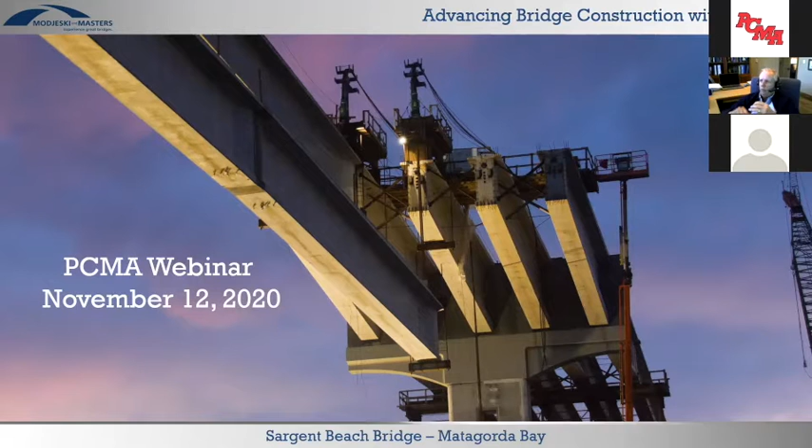A lot of the concepts I'm going to be going through are really small refinements of ideas that have already been developed by others, and we're just trying to make them a little better with every project that we go through. Just to give you a little background, I know Chris did a very good job of explaining and introducing me and explaining what my background is.

I've spent my whole career really involved in pre-stressed post-tension concrete bridges. And my perspective, I think, is that I've spent the majority of my time working for contractors or as a consultant to contractors. So most of my experience has been on the construction side. And we've actually designed bridges for precasters, for contractors, various other clients.

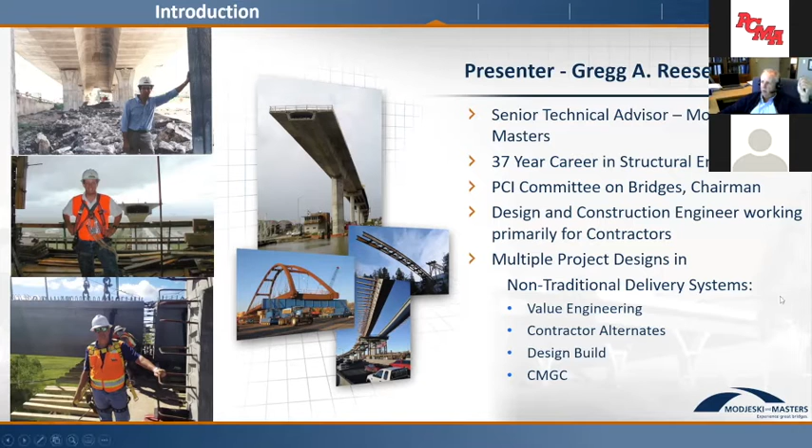Outside of your more traditional delivery system, so I've got a little bit different perspective on that, and what that means is that we approach our projects from a constructability-first standpoint, and we try and use what we call constructability-based design, which I'll be going into in more detail as we go through this.

Moving into our presentation here, precast concrete construction really falls into a category of prefabricated bridge elements and systems. This is a category that AASHTO has designated as a key component of accelerated bridge construction. I like to call it Lego construction because to me, this is real similar to Legos.

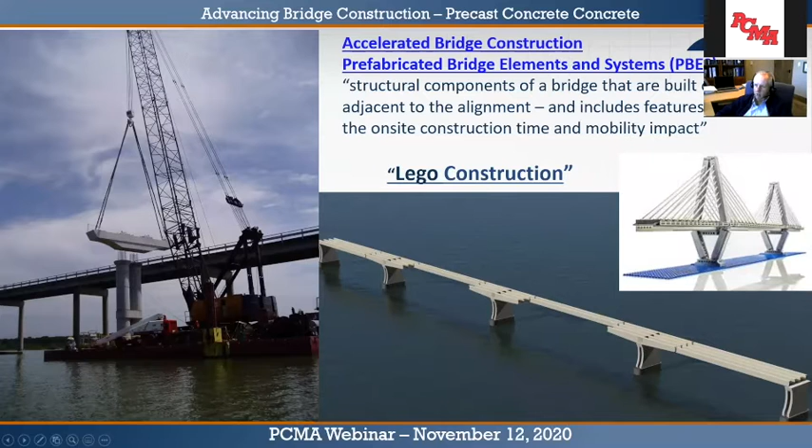If you've ever built Legos with your kids, you dump the box out on the dining room table with the instructions, and hopefully in a matter of hours you've got a Millennium Falcon there on your hands. Precast concrete really kind of goes together the same way. I found this nice little picture of a cable-stayed bridge made out of Legos. What it means is you're bringing pieces to the site that are already made, and you're assembling them on site in a more rapid fashion to really create complex structures.

As I go through this, I'm going to be talking really from project experiences, and I've tried to focus the majority of that on projects that we worked on in Texas. I'm originally from Texas, I'm a fourth generation Texan, went to the University of Texas as well. And so I have a lot of experience working in the state of Texas.

As I go through these projects, these are all going to be slides like this. We're not going to have any graphs, no formulas, no techno speak, other than to describe actual projects and concepts. So we're going to be talking about the advantages of precast, some of the design features, how that enhances these projects. And I'm going to try to bring that into focus from a different type of delivery system, typically being on the builder side.

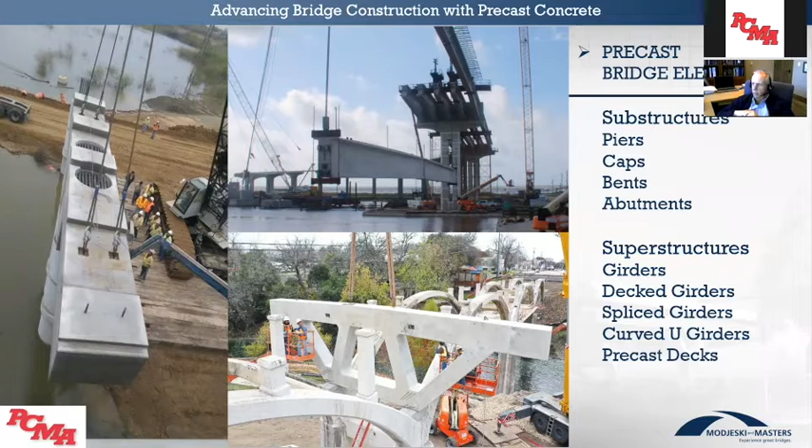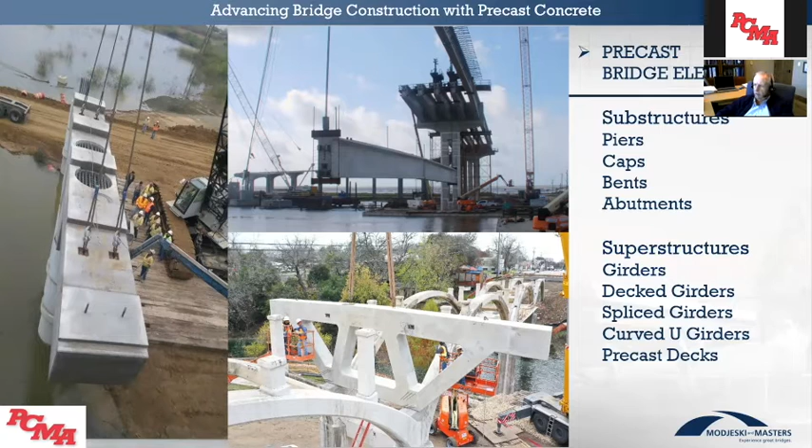The way I've organized this is I'm going to go through substructure precast first, and then segue into superstructures, going through various projects trying to point out the features of how precast elements enhance the construction of these projects. At the end of each section, I'll introduce some conceptual stuff we're currently working on, projects we have experience with that are built and in service, leading to how we're trying to advance bridge construction into the future with new concepts using precast concrete.

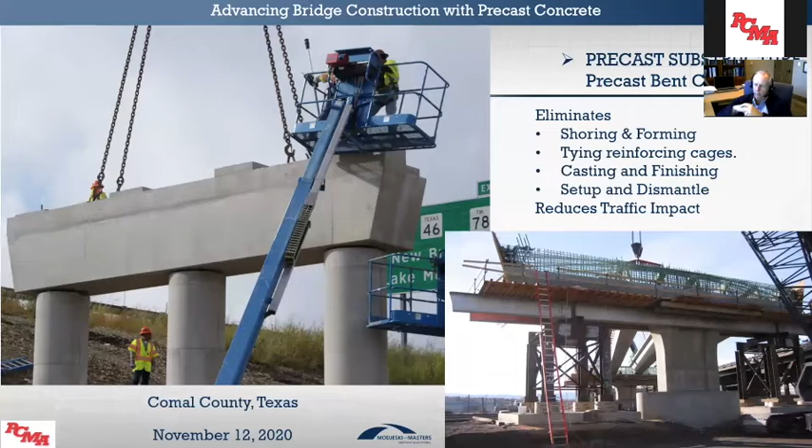First, I'm going to start with your bread and butter, your basic workhorse substructure element, the multi-column bent with concrete cap. On the right-hand side is an example of cast-in-place construction on shoring. I actually designed the shoring system for this particular project. As you can see, you've got to build a structure to build a structure.

That's really what cast-in-place construction many times boils down to. You build a structure, put a deck on it, put forms up there — you're actually building a small factory on top of the temporary structure that you have to take down when it's all said and done.

And then on the left, it can be set in a matter of minutes, and connections poured by the end of the shift, and in one day you've got the equivalent of something much more involved that's done with cast in place.

So really one of the big ideas we've tried to develop is to make the connections easier. When you're casting a piece 200 miles away, shipping it to the site to set it on something cast in place with, say, number 11 bars protruding from it, there's not a whole lot of forgiveness. It has to fit.

So to enhance the constructability of this — and constructability is really going to be my focus as I go through this, constructability-based design — how do you enhance it? Well, you make sloppier connections, and I don't mean that in a derogatory fashion. I should probably say more forgiving connections, so it doesn't have to be perfectly aligned.

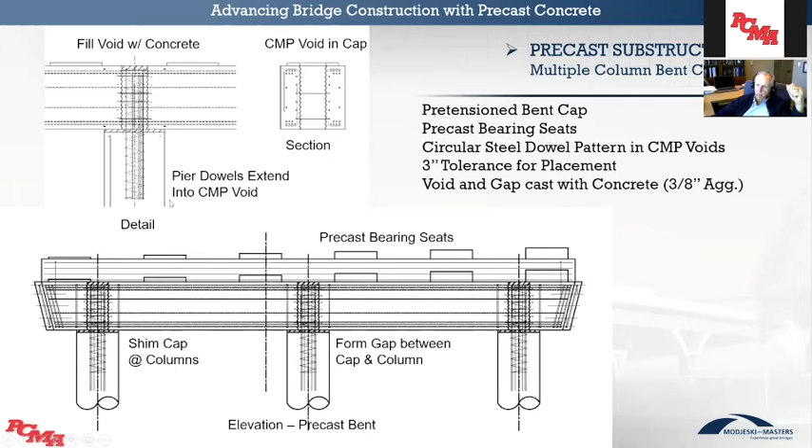Here's an example right there in New Braunfels, Texas, the nexus of the universe of the Precast Concrete Manufacturers Association. This is out on Loop 337 near Highway 46, near where I used to live. I lived in New Braunfels, just down the road from this place, for about 3 years back in the 80s.

So the idea is you bring in these precast caps, lift them off the truck with a crane, and then thread them down over these tight spirals of dowel reinforcing sticking out of the top of the column into these corrugated metal pipe forms.

You set them down on shim stacks to get the grade where you want it, maintaining a 2 to 3 inch gap for flowability of concrete. Then, as you can see, they have a sonotube form here to make the watertight connection between the bottom of the cap and the top of the column.

And then you just pour good old regular concrete, vibrate it out through this thing. So it goes really very quick.

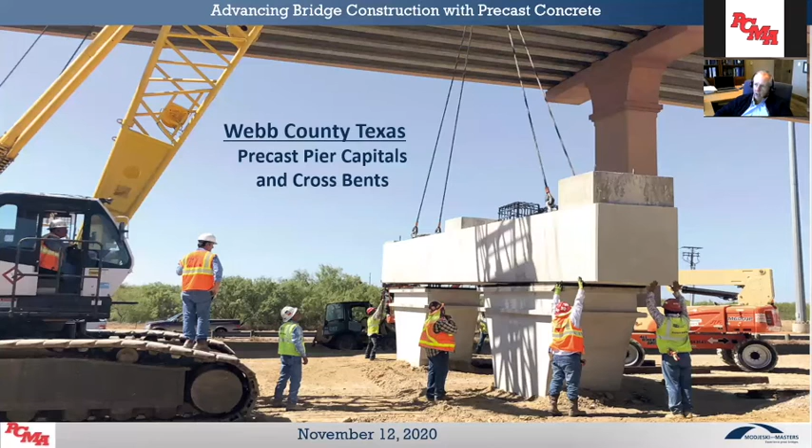The next example, a further refinement — we actually precast these architectural capitals. These are basically sitting on a zero-length column, if you will. As you can see, there's another example in the background of a similar type of construction, but this was all cast in place. We were able to do all of this sort of fancy work in the precast yard and ship it to the site.

The first element being the precast capital, you're able to do this sort of fancy forming in a precast yard. What we did was make an 8 to 6 inch thick shell. The reinforcing from the column extended up into the shell, and then the dowels would protrude out. We would pour the plug here, if you will — you can see how that looks in plan view.

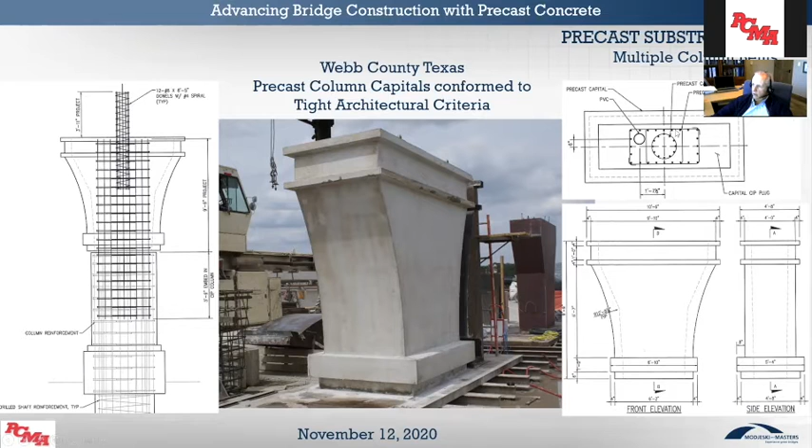Here's a nice isometric view, kind of like Lego instructions from my perspective. We've got a cast-in-place column, we set the capital on top of it, fill that full of concrete, dowels that go up into the precast cap that comes in, and that's really what it all looks like.

We were actually able to bring drainage piping down through the capital and down to a clean out in the drain below.

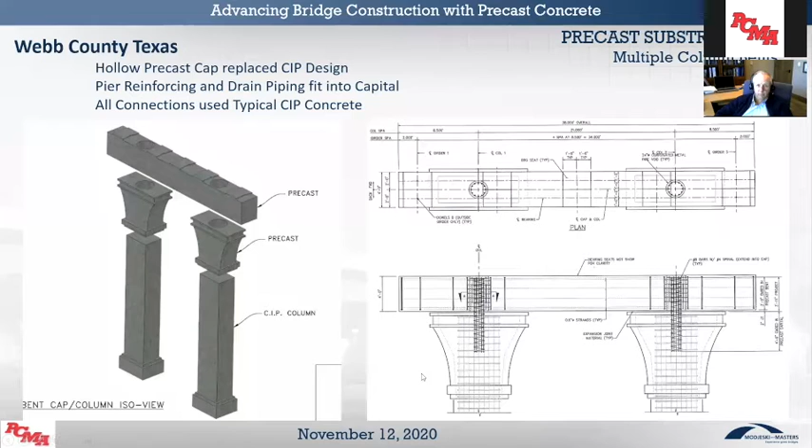So you've got one operation marching in front of the other with prefabricated elements, making this go about as quickly as you could imagine. This project was really quite a success, winning some awards for design and construction.

Going on to our next item of precast substructures, the hammerhead cap is another real workhorse. It involves a little bit more design because you've got transverse moments due to unbalanced loading or wind loads that have to be resisted, so there's more structural demand on this type of connection.

But we've come up with solutions through various projects. This was our first one. We had some really stringent architectural requirements for this, but there were quite a few bent caps on this job, so the specialized forms really made economic sense.

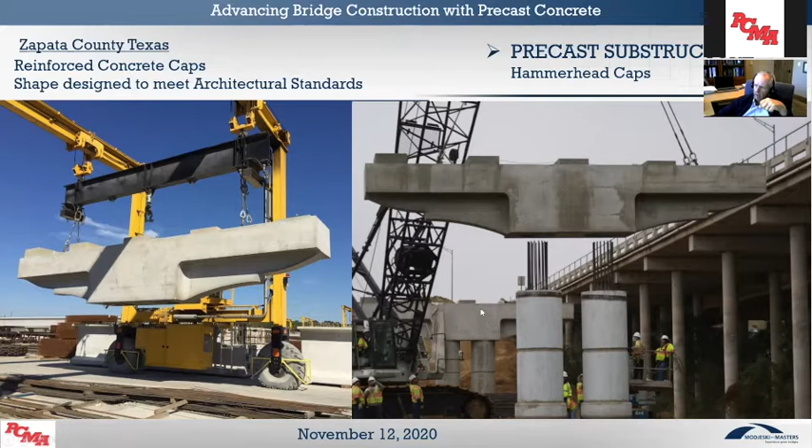We designed it, left the design as a reinforced concrete cap, and accommodated it with these same kind of connections that I'll be showing throughout the presentation.

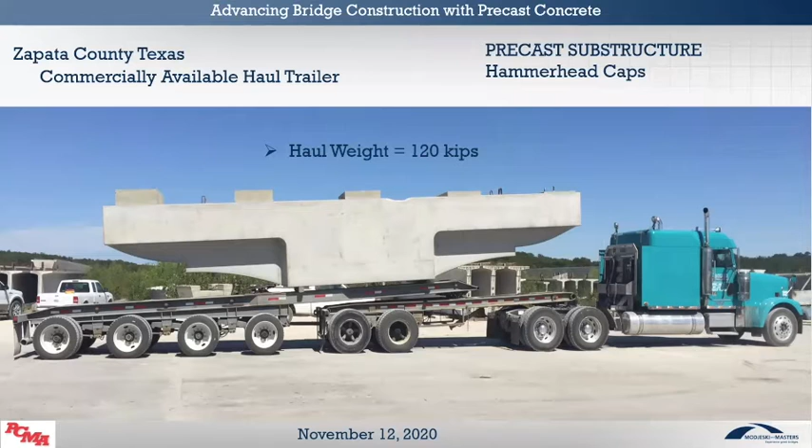Haul weight was a bit of a problem. You've got a 40-foot wide cap weighing 120,000 pounds, so spreading it out on the various wheel loads was a little tricky, but they worked through those issues and got them to the job site.

Here's a nice view of what the void looks like. We did a 42-inch corrugated metal pipe on this 54-inch cap. We've since been able to make these smaller and still have a design that meets all the project requirements. Here you can see where the plugs were poured.

So you can set this, grade it out, do a little bit of trigger work, and then you're ready to pour the plug. Really very simple—you can get a cap built in a day.

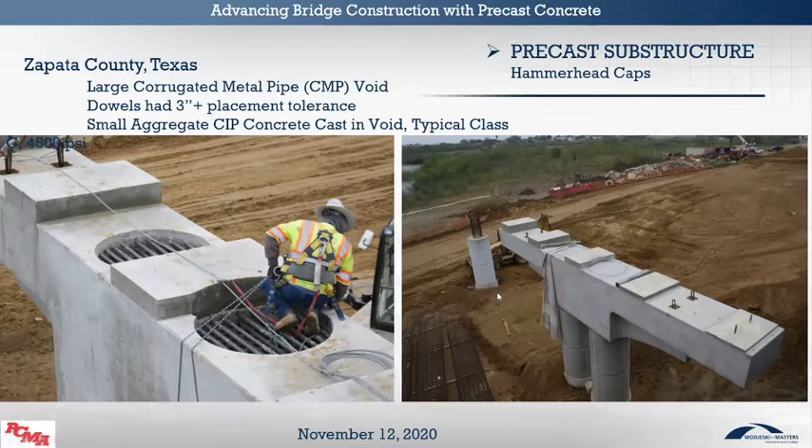As a matter of fact, they built 6 in a day. As they got to peak production, setting them out, they were able to set 6 caps in one shift and pour the plugs. The 6 was really limited by the amount of trailers they had to ship these caps to the job site. So as with anything in precast, the limitations are really bounded by what you can ship to the site.

And I'll go through, you'll see that over and over again. You get too big, too heavy, then you can't haul it anymore—you have to break it up into pieces.

The next hammerhead job we did was on the Sargent Beach project. It's really getting very close to completion of construction—they're doing final slabbing on that.

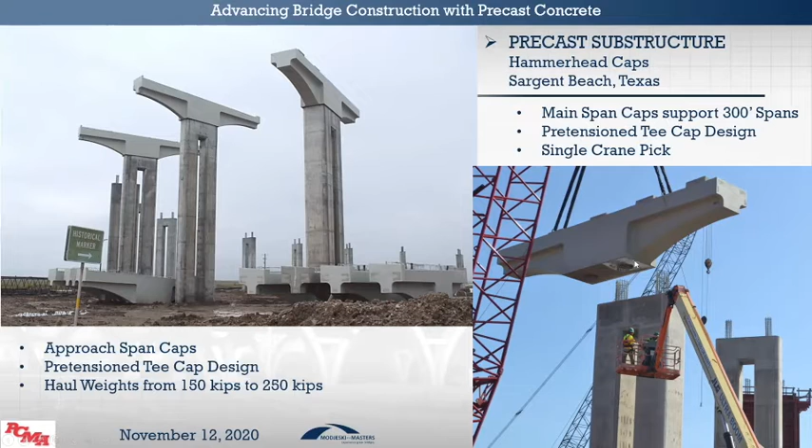This one is a pretension cap, and as you can see, the corrugated metal pipe voids got a little bit smaller. We're still able to handle all the design loadings and have more concrete cover just for reinforcing protection, with less congestion. These are pre-tension.

You can see the strand extensions there before they've treated them on the edge. But the thing this picture really shows me is the difference in finish between the precast element and the cast-in-place. These things came out painted, final finish on them, requiring really no further finish once they got to the job sites. That's another advantage precast has, eliminating a lot of finish work on the job.

These things were even heavier—they weighed 150,000 to 250,000 pounds for these main span unit caps. We actually designed a haul trailer to spread the load out, which we've used on other jobs as well, to handle these heavier loads and get enough wheels underneath them when you've got something a lot shorter than, say, a long beam would be.

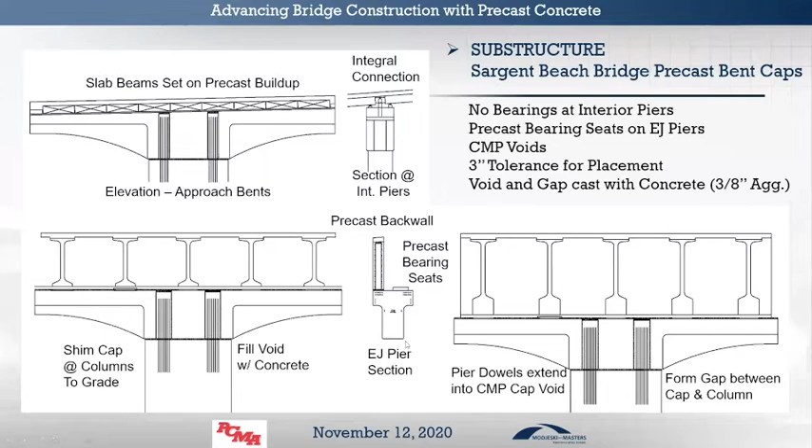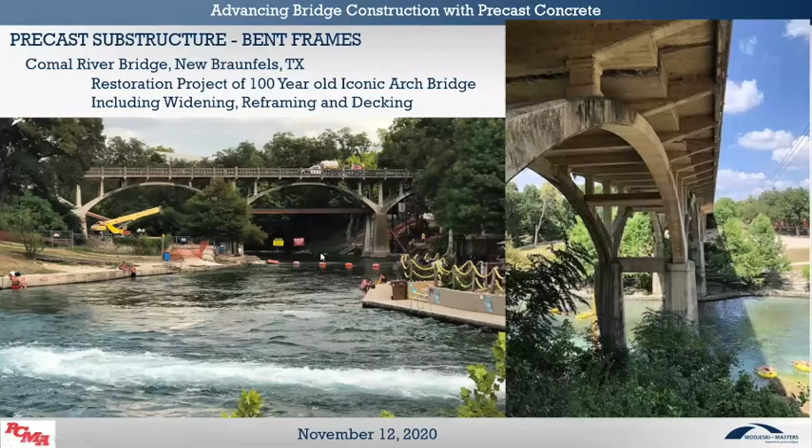This project was a restoration and redecking of a 100-year-old, almost 98-year-old bridge. Really very slender, elegant arches, very iconic bridge for the city of New Braunfels, and they wanted to maintain this historic look with the new project. The way they did that was they removed all of the framing that sat on top of these spandrel columns and the arches, leaving the arches and spandrel columns behind as an architectural treatment, but they no longer support the bridge structure above.

Really pretty clever. So you can see they started demolition here from the middle, working back to the ends, using this super heavy lift hydraulic crane. This was the key element in making this job go very quickly and smoothly in construction.

They used it to lift off all the panels and decking from each end, then got down into the river bottom and set all these architectural frames and the slab beams up above. So they were able to get all of this done in one construction season, which really delighted the citizens of New Braunfels, because they rely an awful lot on the tourist trade at Schlitterbahn, and the Comal River is very much a tourist attraction. They were able to get all this done in the fall and winter months when the river traffic was closed.

So this is how they set these things. We brought in these precast frames - we sort of nicknamed them the pretzels. This replaced a diamond-shaped cast-in-place pier and cap type of basic design.

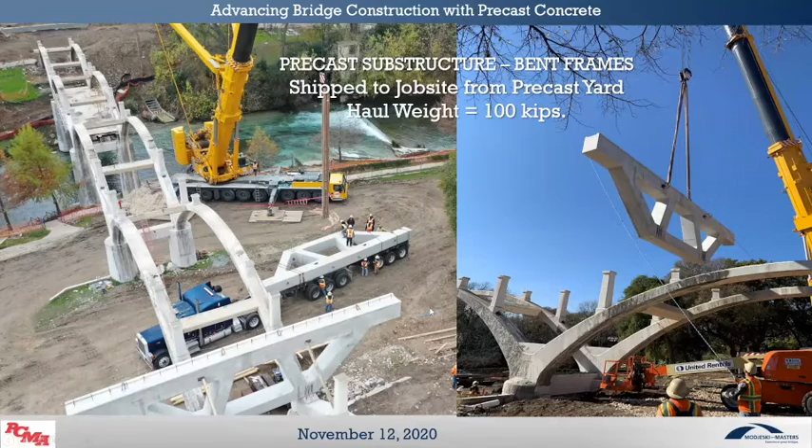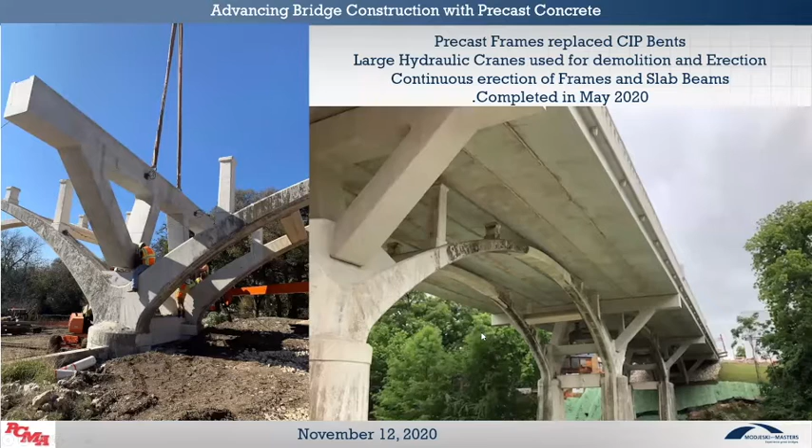So the delta frames, or the pretzels if you will, are brought in. They're set over some pins that come out of the crook of the arch that were retrofitted in. There's reinforcing sticking out of each side that was cast into this block to lock the frames in place. Then these slab beams are brought in, supported at each of these frames, 70-foot span. As you can see, these spandrel columns are no longer supporting it - the arch is really just there holding itself up and adding to the aesthetics of the final product.

Went extremely well - the project was completed about 6 months ahead of schedule, with very little interference to the tourist traffic there. The construction schedule for this project extended into this December, so it was intended to be wrapping up about now, but it was finished back in May. River traffic was open and traffic was available to go over the bridge back in May - well ahead of schedule. Really a total success that was enhanced by using precast concrete elements.

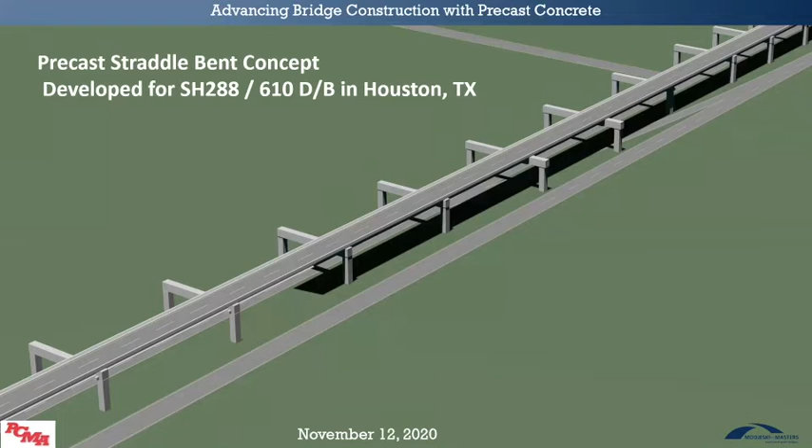So I'm going to wrap up the substructure presentation by segueing into a concept for a straddle bent that we developed for a design-build project down in Houston.

This idea wasn't used this time, it just didn't fit with the particular situation. But we really like the idea, and we've been looking at it on a number of different projects.

Basically what it involves is using voided box beams, the same side-by-side box beam technology we use on a lot of our bridges. We're going to apply this to a straddle bent here. We've developed designs up to 125 feet that can support bridges 60 feet wide, even with 200-foot spans. By combining a pre-tension box beam and post-tensioning to finish it off, you're able to build these things in relatively short order using precast concrete instead of more conventional formed and shored or steel straddle bents.

So it adds another option for this particular element. We were even able to add DAPs on for the section supporting the bridge above in this case. On other ones, beams can go up over the top as well.

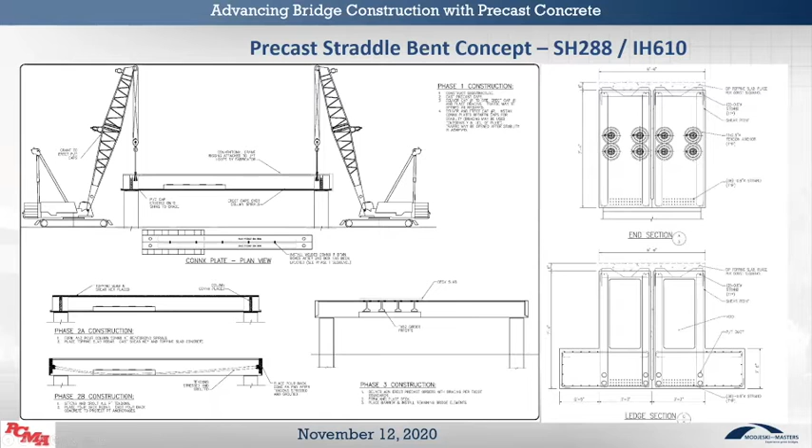So this is how it goes together. You cast the piers, then bring in the first beam and set it down on the pier. You come in with the adjacent box beam and set it down. Those are braced off to the column. Then you cast the top slab and the shear key in between, as well as the column connections. And now you've got a uniform composite box beam system.

You start setting the beams up above and the roadway below. But the compelling advantage here is that you've got pre-manufactured elements you can bring in that eliminate the need for heavy shoring and interference with traffic below, and a lot of operations that could impact public safety.

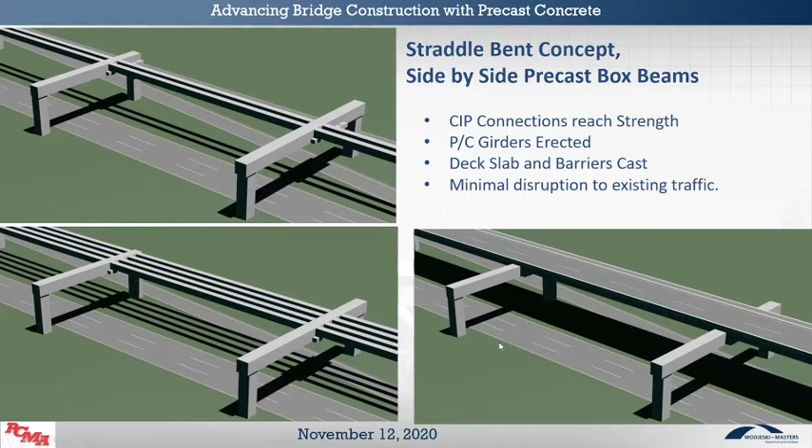So you can actually keep these roads open with periodic shifts to do erection and maintain these facilities in a safe fashion, getting the bridge built from up above with minimal disruption. So we think this is an idea that has huge promise going forward.

So with that, I'm going to segue into superstructure construction, and I'm going to present on splice construction. I have a lot of experience with splice construction, over 20 years. This has become something that, over the last decade, has become popular in longer span applications in Texas as well.

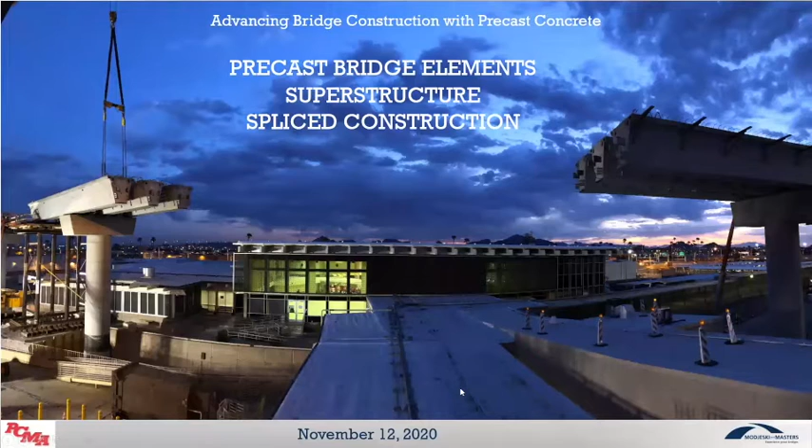So for those of you not familiar with how spliced construction works, I'll briefly go over the fundamentals of how it all comes together. As I stated before, it's all about getting big, heavy pieces to the construction site, and the less heavy and the less big they are, the better.

You can break up longer span structures into a series of precast pieces with vertical supports. You set them up at the job site, then cast in place small sections in between, post-tension it, make it a composite, fully continuous unit, and pour deck slabs on it. We typically design these to be supported only by the girders once it's all stitched together, and after post-tensioning we remove all that shoring and cast the deck in an unshored condition.

One of the other advantages, which we hope we never have to use, is that we can replace the decks on these structures since the deck slab itself is not essential to the load carrying of the bridge. So you've got a replaceable deck system that can be maintained for as long as you want with a durable, fully compressed post-tension structure, which has proven to be a very long-term durable type of structure.

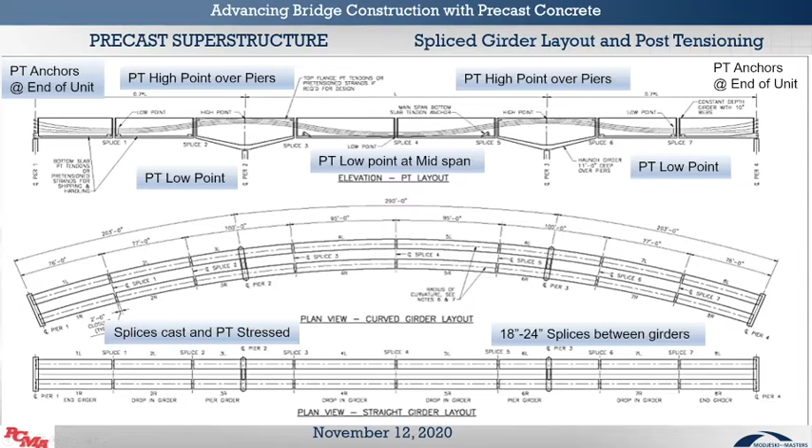Texas has moved into this area. We've got 8 projects that are either under traffic or in construction right now. 6 of these have been in service for a while and are performing very well.

Sargent Beach is finishing up here. I expect it to open in a matter of a month or two, certainly early part of next year. And the Grand Parkway Interchange in Houston, which is a curved spliced U-girder project, is really a new technology being introduced that's never been done before in Texas.

This Dart light rail bridge is a spliced bulb T bridge for the Dallas Area Rapid Transit system, which has a 250-foot span over the levee in the Trinity River Basin, which was a new technology at the time. But we've had a series of successes that have led us to continue building these kinds of bridges.

We've got one design-build project, the Dallas Horseshoe, and 3 value engineering projects, the other 4 with your more traditional design-bid-build delivery system, but for a variety of owners. We've got 4 TxDOT bridges, 2 city bridges in Fort Worth and Dallas, and a couple owned by transit agencies, Dallas Area Rapid Transit and the Harris County Toll Road Authority.

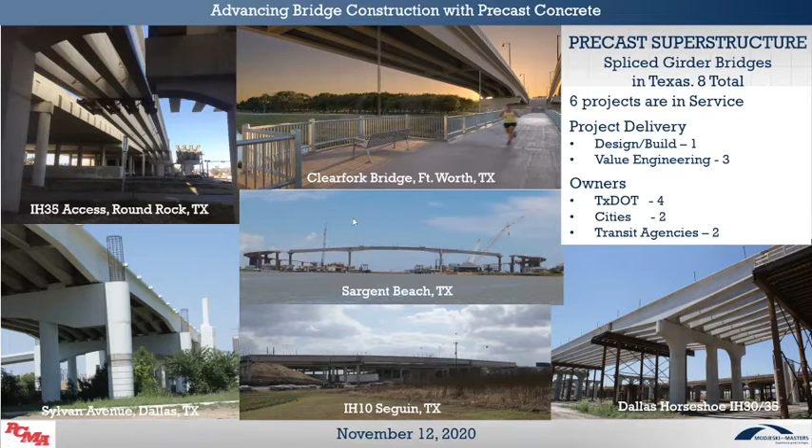First one was the Dallas Area Rapid Transit. As you can see, the levees here in Dallas are very touchy. They don't want any construction loads on them, so this had to be built to span over that particular levee for a branch of the Trinity River, a fairly small branch.

This is really more a matter of getting over the levee without disturbing it, because these things really do fill up with water when it rains. So it's a 250-foot span, the longest precast bridge built in Texas at the time.

Really a groundbreaking project. What the real significance to my mind, other than this being a new type of project built successfully, was that it introduced this type of precast shape, a new type of girder. This is 10 foot 10 inches deep, and 82 inches deep at the shallow end where you go to the constant depth section.

But what this did was introduce a new product line into the state of Texas that has been used over and over again. This particular shape that was developed for the DART project has really been the workhorse for the majority of these spliced girder bridges built in Texas. A lot of volume follows this one little 3-span bridge.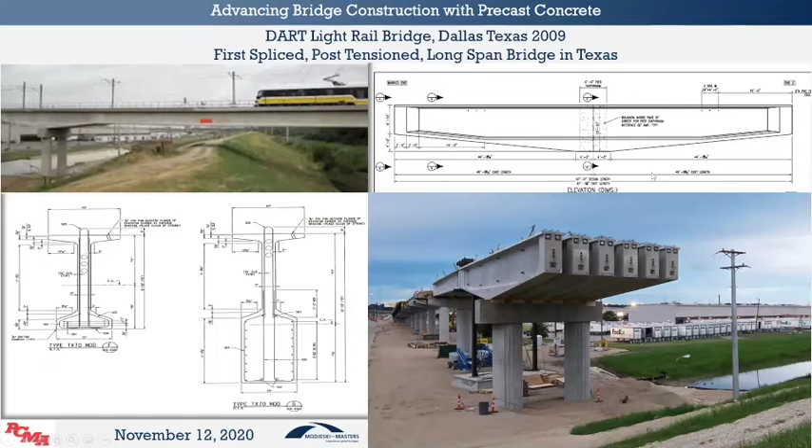Sylvan Avenue was the next project built, and it was really a quite large application of this technology following on the Dallas Area Rapid Transit project. This picture was taken in 2013 during construction. This had three 3-span units, the largest being the river crossing over the Trinity at 250 feet, with a 150-foot drop-in section and 98-foot long pier sections on either end.

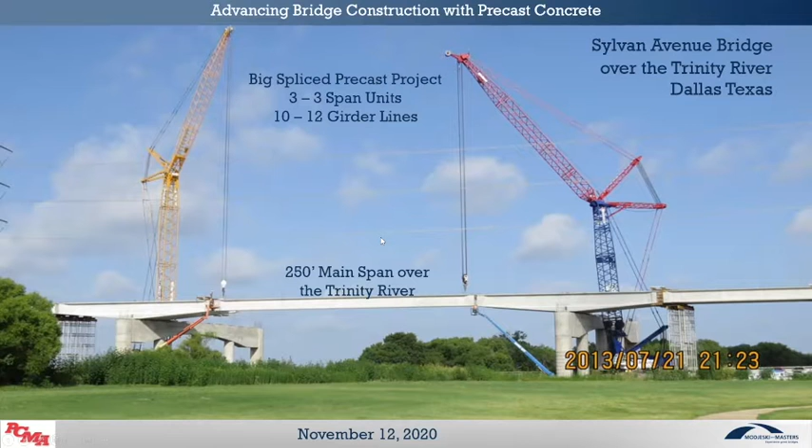Following this one is a rather small bridge, an access road in Seguin, Texas, going over the Union Pacific Railroad. We couldn't get any construction equipment down in the site, so this was set up to be a zero impact to the railroad type of job.

This was a value engineering proposal where we converted a 200-foot simple span to a 3-span continuous unit using existing shapes that formwork was available for in the state, which greatly enhanced the economy of this project. I think it also enhanced the constructability of it.

What I wanted to demonstrate with these two slides is that these two projects are really sort of companions that show this is a scalable solution. It can go from small bridges to much larger projects such as this, with 10 to 12 girder lines going hundreds and hundreds of feet. That was a lot of volume on that one, where this was a much smaller volume, but used the same solution.

What's really noteworthy on this particular project was because of the accelerated construction schedule on the Sylvan Avenue project, they wanted to set all of these girders continuously. Once they got their falsework set up, they wanted to set them continuously until they were all set out, then cast all of the splices, post-tension them all, and have a much more uniform, consistent construction operation.

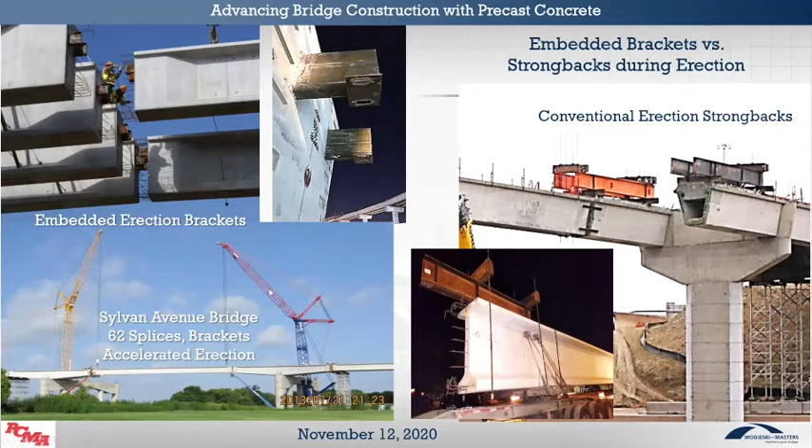So to give you an idea what this looks like in detail, I'm going to use the Seguin Bridge, which is the simpler bridge of the two. The pier girders here at section BB have the lower bracket, and this was actually attached to the end forms in the precast yard to hold it in place. Then the drop-in girder over here, section DD, that's the one to be supported.

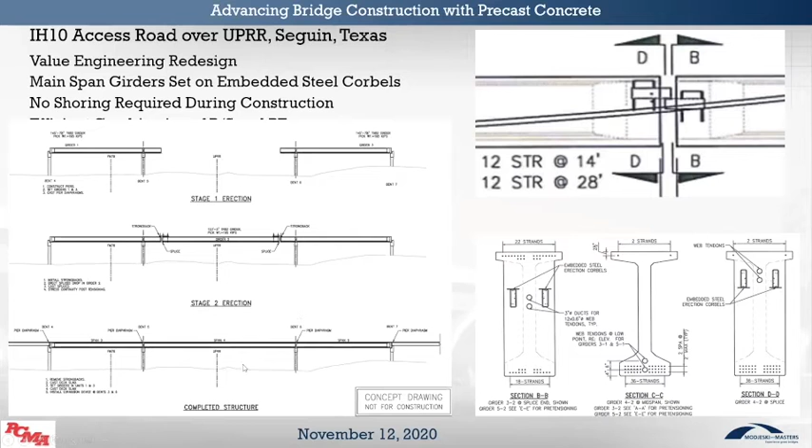So you bring it in, and this one just sets right on top of the other. These are cast directly in the yard through the end bulkhead forms to make sure that they're in the right spot. In this case, we erected the two end girders, cantilevered them roughly 15 feet over the end of the pier, brought this drop-in piece to make up the rest of the 200-foot span, everything done from the top. And all of this was erected in a 3-hour shift.

So you've got 4 girders, we brought them in. All of this was done in between rail traffic, so there was no disruption to rail traffic. I've done a number of these projects with railroad crossings in similar fashion with both strongbacks and these brackets. Railroads love them because we really don't have to have a traffic closure to be able to get these things set. And once these things are set, you're done.

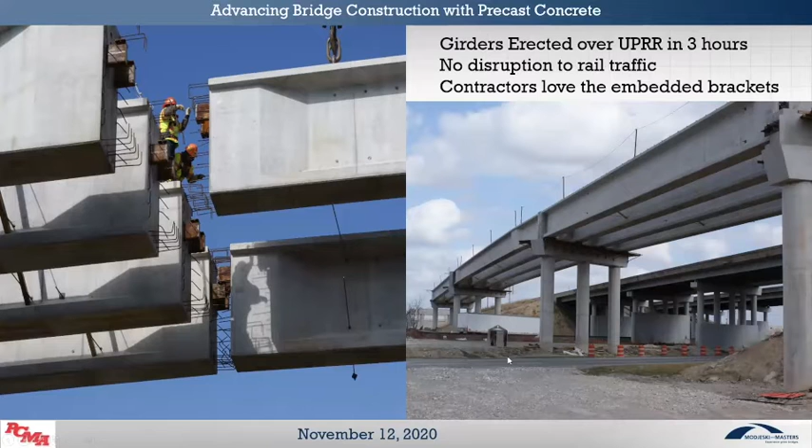There's no dismantle, you form this up. You can do the vast majority of that work from the top. Again, very little disruption to rail traffic. So this one went together very well. The contractor was very pleased with how that all slipped together.

So taking all these ideas forward, Sargent Beach Bridge is really the record setter here in the state of Texas. 300-foot span over the Intracoastal Waterway down near Matagorda Bay in Sargent Beach, Texas. We've got larger beams here, these are 120 feet long, and they're 12.5 feet deep over the pier. In this case, you can see we had lifting winches that brought in this 180-foot drop-in girder. Similar in-span girders, 150 feet, I think, to

160 feet. We laid all this out during design to demonstrate, through a rendering, what the precast caps were going to look like, what the completed framing system was going to look like, because the aesthetic look of this was important to this particular district.

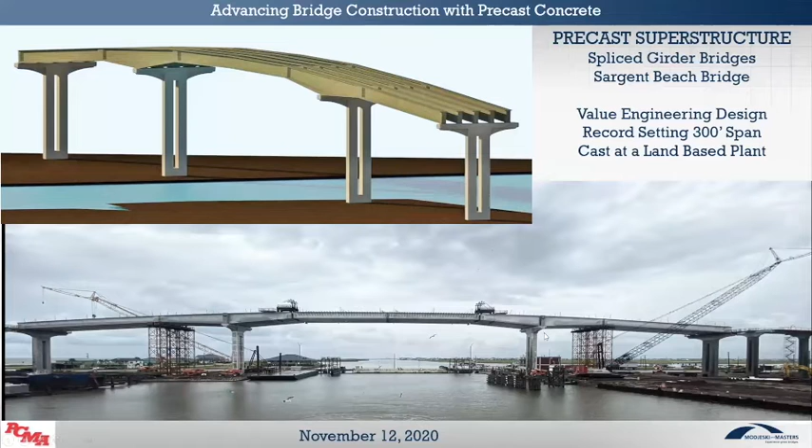And again, we've got a value engineering redesign, having to work in close cooperation with the precaster, the contractor, and the Texas Department of Transportation, both at the district level and at Bridge Division in Austin. We worked through all of this sort of stuff. The basic design was 14 feet deep and really couldn't be shipped to the site from a land-based precast plant. So the challenge was, how do you design this thing with sufficient depth to handle a 300-foot span, but still be something you could ship over land?

And that was how we were challenged to come up with this shape. We had done a couple of other proposals on projects, so we had some experience, and we knew that we could make a 12.5-foot deep girder work. The precaster said, if he can go to 12.5 feet, I can ship it there.

They went through all of the various permutations that it took to get this approved, and these pieces were delivered to the site. This gives you an idea of the scale of the piece, where we've got one of our engineers standing next to it in the precast yard in San Antonio. It was shipped 200 miles from San Antonio, Texas to the coast. This is a real game changer in my mind for the precast industry.

This is something that can be used at any precast plant to take precast concrete into the long span arena. That's really been the purview of cast-in-place structures, segmental, or steel construction. Now we've got something where more conventional precast shapes can be cast without barge slip access, because the vast majority of these long span bulb T projects have been done on the coasts, in plants with barges, where they could cast a 15-foot deep piece, ship it to the site, and erect it.

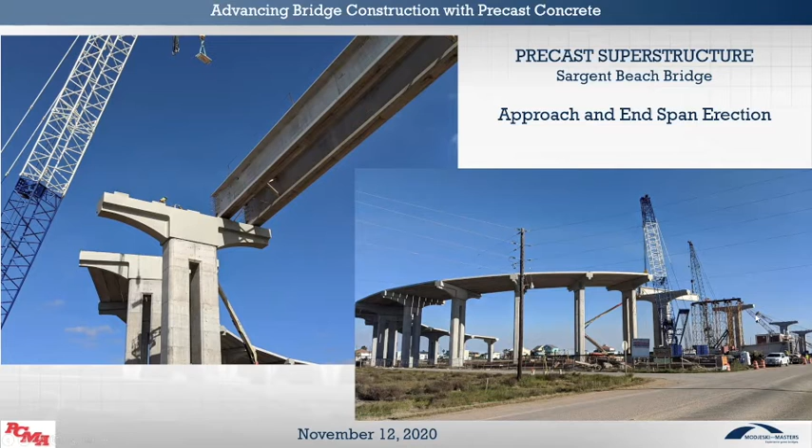So once we got these cast, we started erection. We've already gone through the precast caps that we set. These are all precast slab beams on the approaches leading up to the main span unit going over the intracoastal waterway. So we started by setting the in-span units on a single tower of falsework.

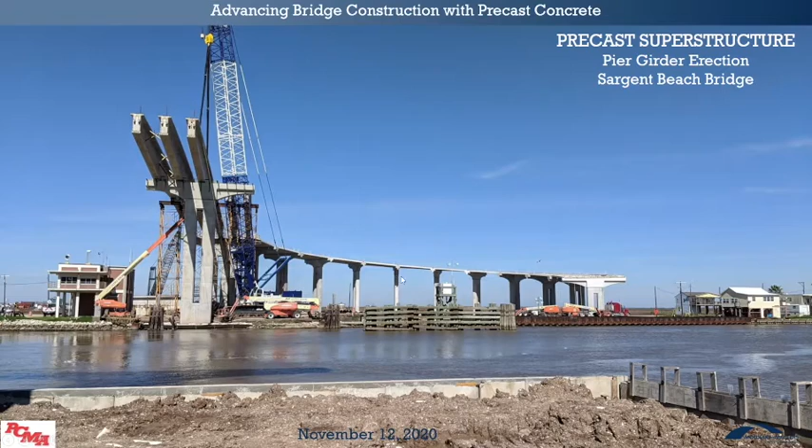Once those were all set out, we would set these pier girders. We've got some really good photography on this particular project, because we really feel like it's a groundbreaking type of project. So once these end girders are set, we're setting these pier girders with a single pick crane on the pier.

They're balanced, but in order to maintain stability and safety, we bolt these through some embedded steel brackets in the webs. We actually bolt this end to the previously erected piece to keep it stable during construction, and then we make these splices on both sides before starting the main span erection.

We've got an 180-foot long girder here that's 8 feet deep. It was a little too heavy and long to ship, we thought, so we also had issues trying to maintain the vertical curve profile. So we broke this in half, site spliced it, and actually cambered the girder to follow the vertical curve profile. We brought these out on barges and lifted them with a winch system, which worked pretty smooth.

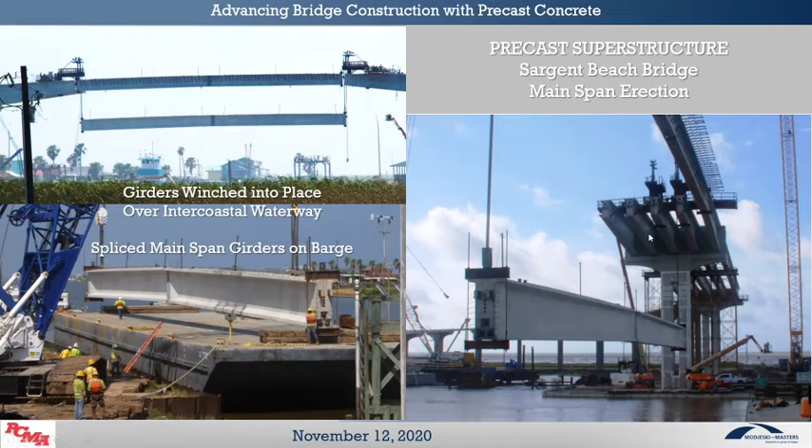This was my first experience with a winch-based erection system, but this enabled us to not have heavy cranes in the waterway on barges, minimizing the disruption to barge traffic as well.

Once they're up there, these are sitting on those same embedded steel brackets I've shown you on the other projects. We just keep rolling this forward. So this is a 180-foot girder that weighs 325,000 pounds, sitting on those same type of steel brackets as the smaller projects with the 200, 250-foot spans.

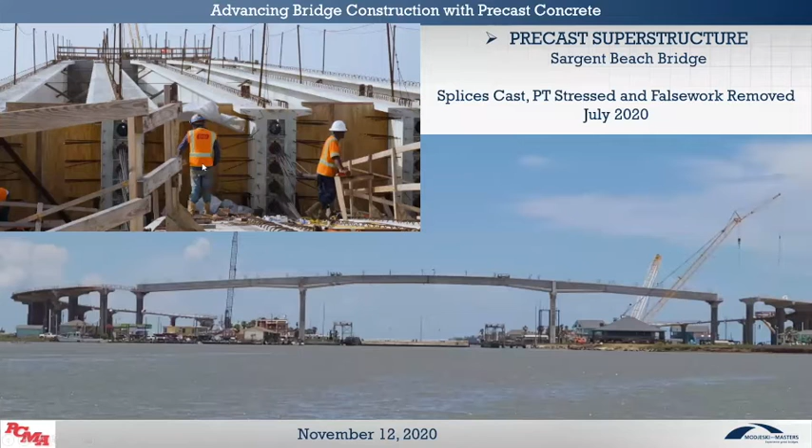Once we get them all spliced, they were post-tensioned from the expansion joint end to the expansion joint end. Falsework removed, winches taken away, and you've got a continuous girder line system that's ready for forming the deck slab.

I tried to get some completed project photos, but we're probably about a month too early to get there. So I'm going to briefly touch on an exciting project in Houston, Texas, my hometown: the 249 Grand Parkway project, which is in the early stages of construction.

I'm showing you some pictures of the companion bridge, which is the J.T. Butler Boulevard in Jacksonville, Florida. A very similar type of construction—we're using very similar details on this. We've designed both of these projects.

This one is going to include 4 connector ramps on the south side of the interchange, with the north side to be built at a later date, that are going to use spliced continuous precast U-girder sections. So a new shape being introduced into Texas.

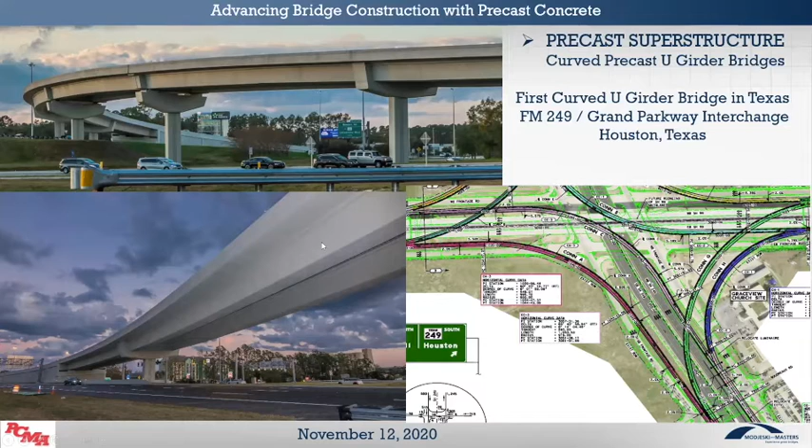So this one's going to be a real game changer, I believe, as well. This is going to be 4th and 5th level direct connectors, so these guys are going to be way up in the air. Right now we're in the precasting stage, early in the project. We've got site work, piers being cast, false work fabricated, and the beams being cast. In 6 to 12 months, we'll have a lot more to show you on a project such as this.

Now, when we were practicing this a couple of days ago, Chris asked me what my favorite bridge project was, and without a doubt, this is my favorite bridge project. Forgive me if you've seen a presentation I've made before, but this job just has it all, and it's really a fairly small 3-span project. Nothing super daring, but it really typifies what you can do with precast concrete to really enhance constructability and economy on a project. This was built back in 2011, 2013.

The bridge is being renamed for Rick Lawrence, who was the president of Lawrence Construction and was my client on this project. Rick passed away earlier this year. He was a 4th-generation leader of Lawrence Construction, which has almost a 90-year history in the Denver area where we live. Rick was really quite an innovator, a professional engineer, and construction company president, and he was my client on this project.

Rick really pushed the vast majority of these ideas that we developed on this project, and this was done as a value engineering proposal as well. This really involved a lot of coordination between Colorado Department of Transportation, their bridge group, ourselves as precaster, and Lawrence Construction. The bridge that it replaced is what they call the Bronco Arches.

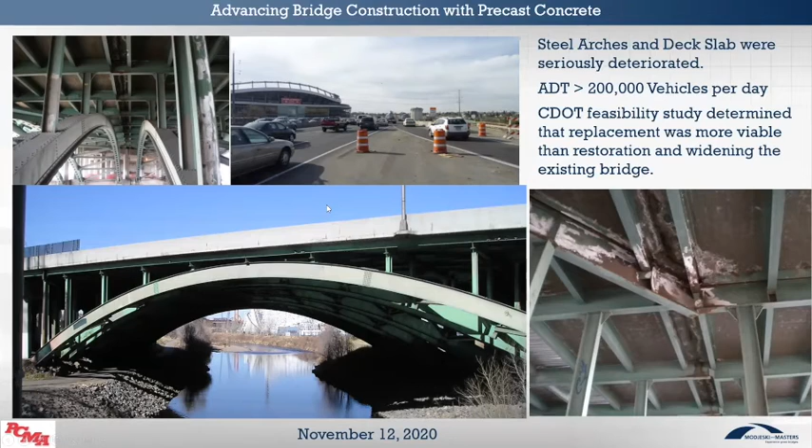200,000 cars. This is the final product. It's a completely continuous, rigid frame, no bearings anywhere on this structure. We've got flexible abutments at each end. We've got a single drilled shaft under each one of these columns, with about 40 feet of free length of the drilled shaft before it hits the bedrock layer in a rather soft soil layer. So we've got a lot of foundation flexibility, enabling us to do this independent of any need for bearings. Very low maintenance project.

As you can see, we've got the integral abutments at each end and a rigid connection between the precast beams and deck. But the real cool feature about this is it's a completely precast bridge. These are precast columns, these are precast beams, and we've got a full depth precast deck up on top.

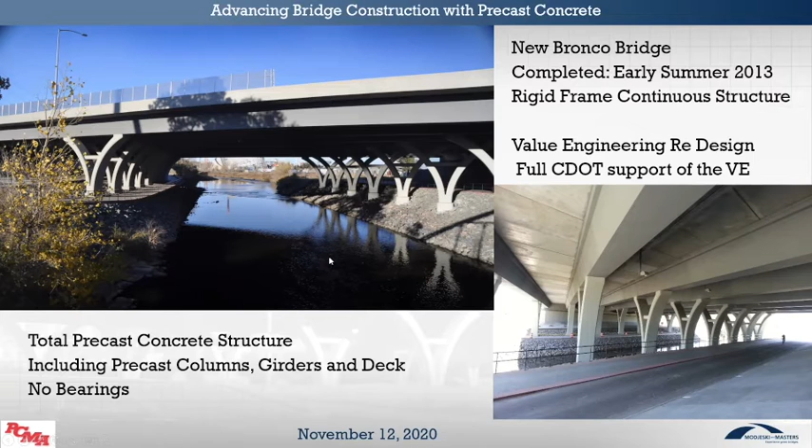The original design was very similar to this, so really it was a major tweak, I would say, rather than a scratch and redo. We had a solid cast-in-place pier here that Rick wanted to precast. He wanted to eliminate the bearings and just make a rigid connection. He'd built a similar project many years previous in Conifer, Colorado, had good success with that. We maintained the 6-foot pre-tensioned U-girder design with minor post-tensioning over these piers. That's really the only post-tensioning in this girder line, and I'll go into that a little bit more in just a minute. Just really a very cool structure.

It was initially conceived as a 5-phase construction, so we would do demolition and add on the south end of the project, then switch over to the north side, working our way into the middle. Rick was able to work with Colorado Department of Transportation to combine phases 2 and 3, getting it down to 4 phases and accelerating the construction schedule.

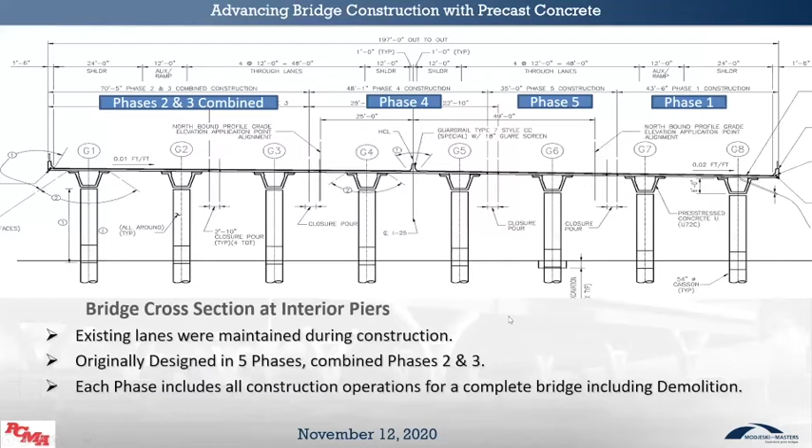We were working in very close cooperation with the Colorado DOT through all of this. They designed the original bridge, and I worked with the design engineer through the value engineering process. That close cooperation was essential to making this thing work.

First thing we did was precast the piers. They wanted an arch look. The original pier was solid, so we were able to do these precast ribs with a connecting tie in between.

These are some of the design details. We had reinforcing sticking out the top up into a void into the precast girder, so we cast a connecting diaphragm there. We've got reinforcing protruding out the bottom of the precast pier that overlaps with the drill shaft reinforcing, and I'll show you how all that went together.

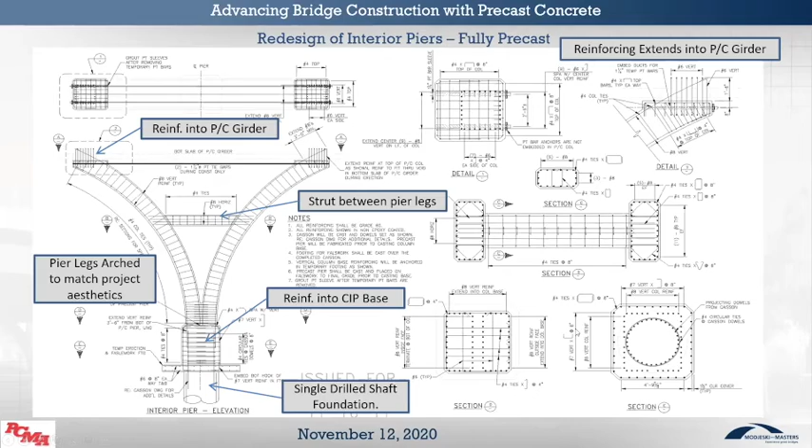The piers were cast on a mud slab with FCO forms in the contractor's yard. We cast them on the job site because it's over 30 feet from here to here, so it was an interesting haul to get these moved the 300 yards from the storage site to the actual job site.

We actually trucked them up an on-ramp and lifted them with a single crane, with the lifting eyes incorporated into this cross strut. They continuously cast these things and just stacked them up like cordwood until they were needed for construction. This is how it went together.

You've got a little 12-inch footing cast right on top of the drill shaft. FCO towers, conventional rental FCO towers built. The piers were threaded into these FCO towers, lined and graded. Connecting base was cast, so you could set these on one side of the river.

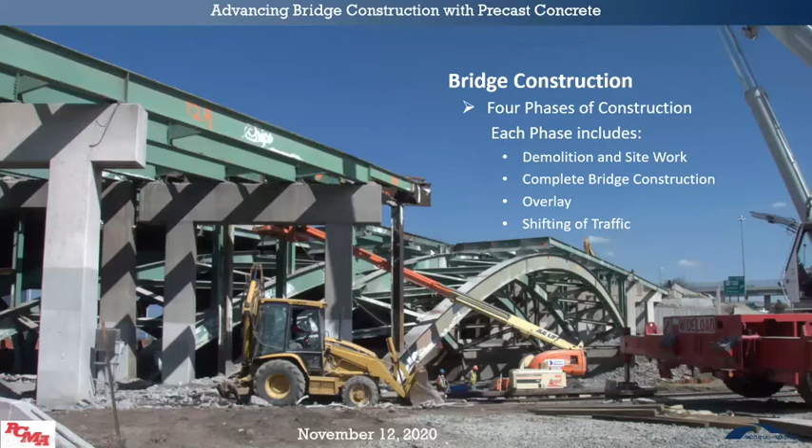Each side of the river in one shift, cast the base the next day, and 3 days later you're ready to set girders. So as I said, every phase - foundation construction, substructure, superstructure, decking, asphalt overlay, and so on - when I talk about a phase, it's all of these operations in each phase.

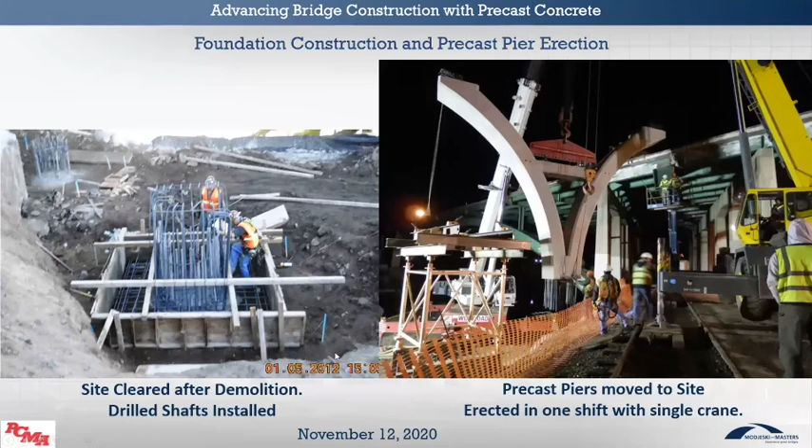So there was quite a bit to do to get this thing built, and by using as much precast as we could, we were able to accelerate this to really come in under the original schedule.

Here we've got a footing poured that we're going to pour on top of the drill shaft. We're tying the cage for the connecting base. You bring in all of the piers in one shift, threading them on each side of the river in one shift, then pour the base the next day.

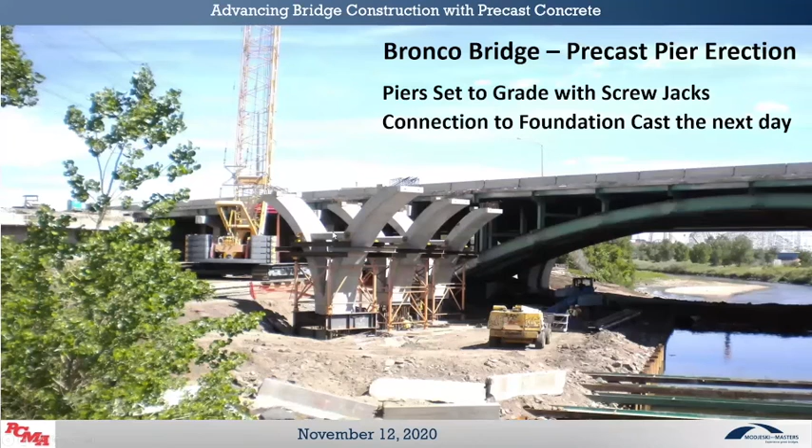That's what it looks like, threaded through the shoring tower. Cast the base the next day, and 3 or 4 days later you get strength and you're moving into girder construction. So you can see, like that job in Laredo that I showed you, one thing leads to another, to another, to another. In very quick order, you're moving through a lot of different operations in a very short amount of time.

The design of the piers was really based around the construction loadings. We designed these legs to support the girders, so there was no shoring required, no setup and dismantle on that. This is what it looks like when it's erected.

There were just so many clever things done with this job. The precaster actually tied all of these anchor blocks and various diaphragm forming inside the box at the job site, at the precast yard. So it was shipped to the site with the cages already tied inside the girders, which made it really very quick to set up and do all of these cast-in-place connections.

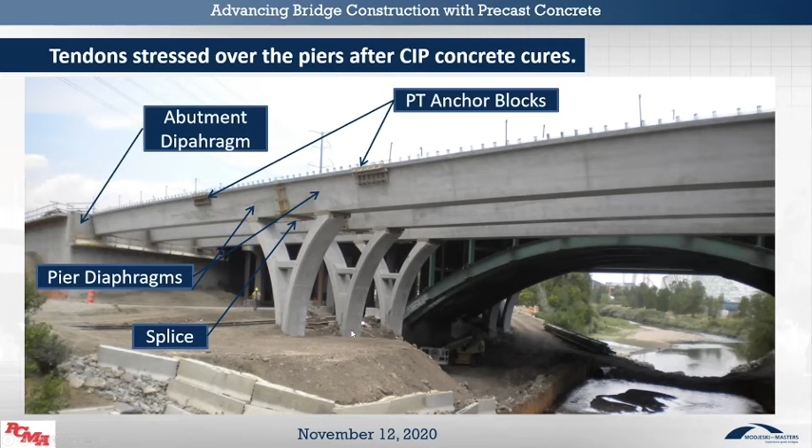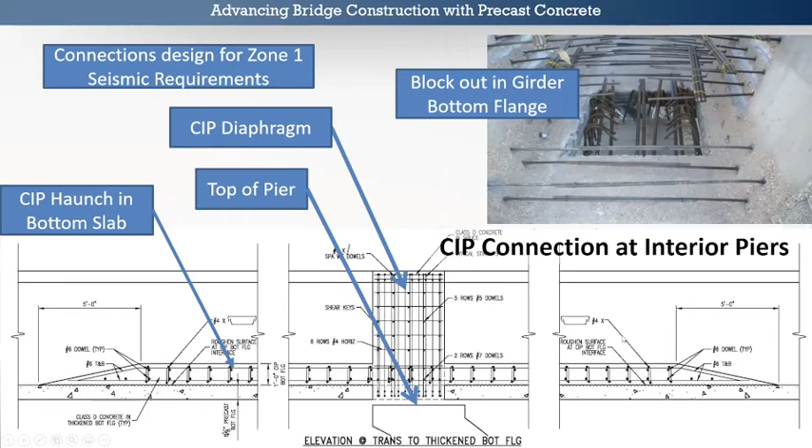This is what it looks like after you've set the girder down on the column - the reinforcing protrudes up into the girder. We make a diaphragm casting on top of it, a thickening slab for negative moment capacity.

Once that's done, you're post-tensioning these tendons just over the pier. As I said before, this is a series of pre-tension beams clamped together through the splice over the pier, and that's all the post-tensioning you have until you get into the deck.

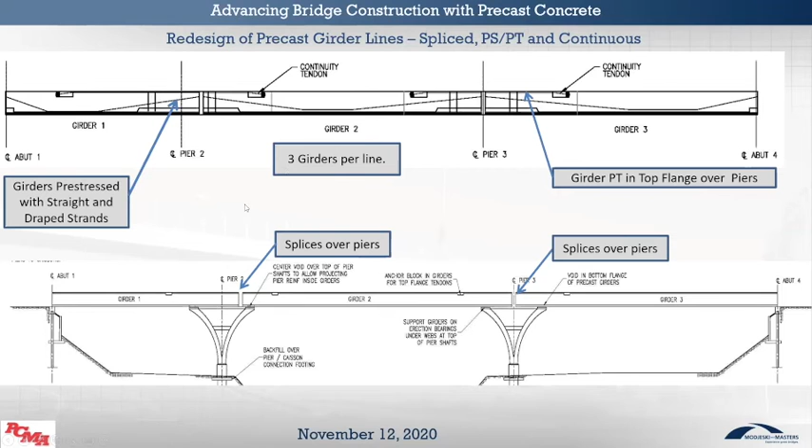Once these are set, we're coming in with full depth, pre-tensioned 8-inch thick deck panels, with pockets for shear reinforcing to connect it to the girders below. These were all set on leveling bolts, and it was lined and graded in about 3 days.

Then all of the connecting concrete was cast. What was really another cooperative effort on our part - the original specifications required sort of an exotic high-strength grout mix that had to be batched and pumped in on site. Each one of these flange lines has 15 yards, so it would have been very difficult to do that without cold joints. We worked with the DOT to allow us to use the same concrete as the precast panels, a 7,000 pound mix, to make that connection.

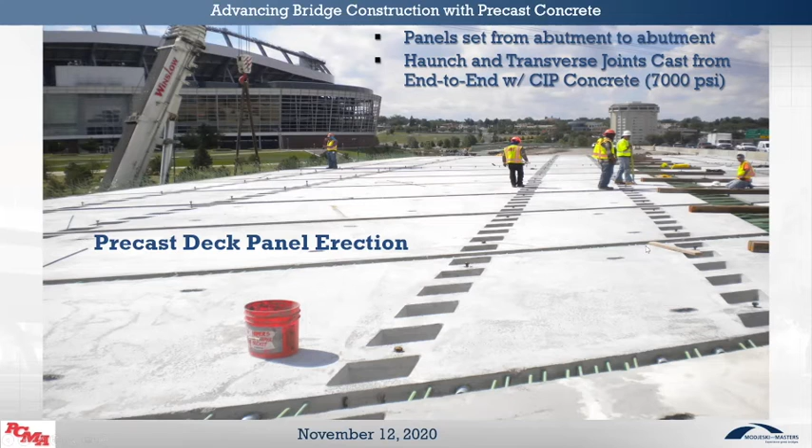These were all pumped in continuously. The joints were all cast, all in one continuous operation until all the connections were made.

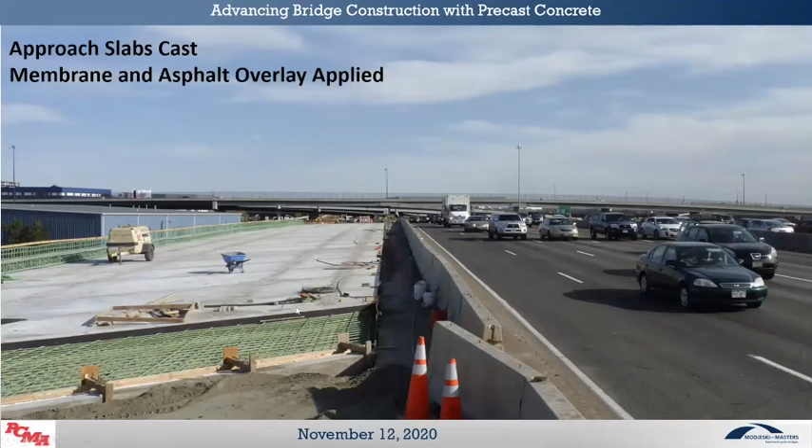Then fairly light longitudinal post tensioning was applied with 4-strand tendons at about 3 to 4 feet on center. Membrane applied, overlay, striping, traffic shift, start again.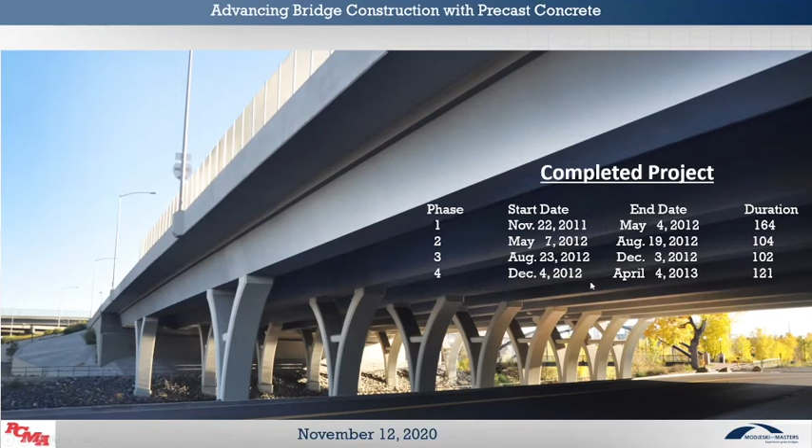Third phase, 102 days. And then the last phase, wrapped up and completed in 121 days, actually had a 2-week delay due to some heavy snow in late March, early April. But it was built ahead of schedule.

And again, I'll stress it one more time, close cooperation. All of these value engineering projects that we've done require everybody to be on board with it and helping to move this along, because it's in the construction schedule where you're doing all this stuff. We were able to do all this and accelerate the process. We had really delay-free operations. Everything went together very well. I don't recall a single issue that we had to solve that slowed construction down. This was really based on an extensive use of precast concrete.

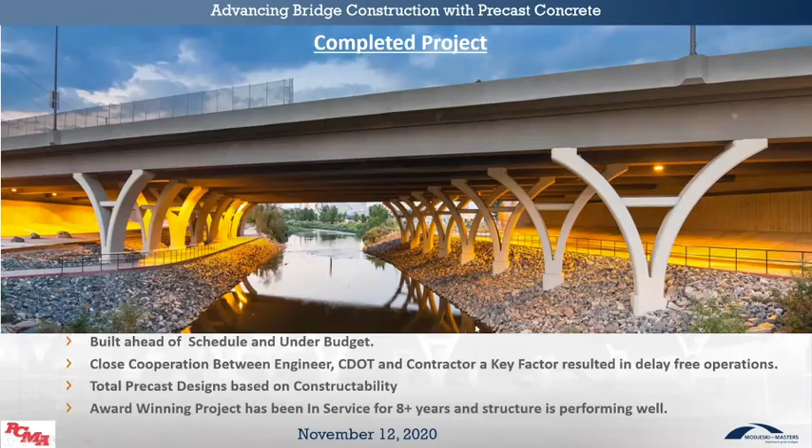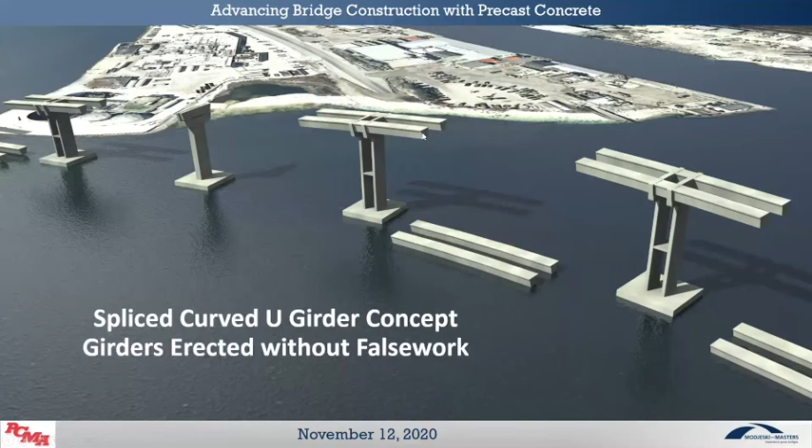So now at the end of the superstructure presentation, I'm going to go to some concepts that we're currently developing. This one's for a project in Cape May, New Jersey on the Atlantic coast. This is a shipping channel with 250-foot spans for boat traffic going inland from the open ocean. It's an S-curve shaped bridge, which we have preliminary designs developed for using spliced girder construction.

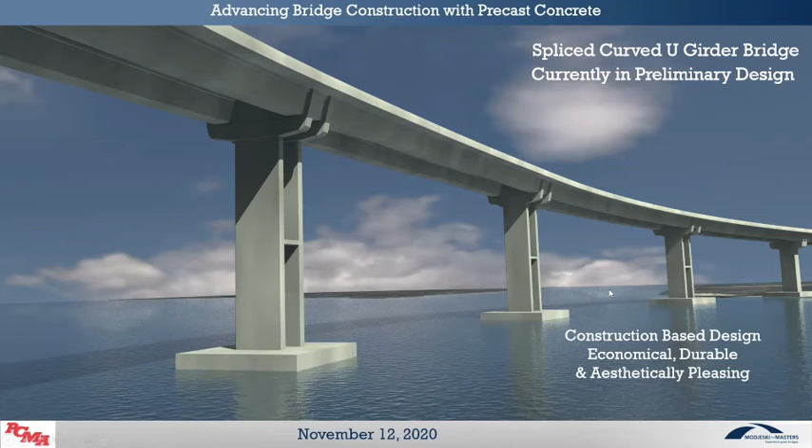But the thing we're working on here is using a twin wall pier concept to connect these girders. You can set them directly on the pier with no shoring, make a connection, and then you've got sufficient capacity and rigidity to set these drop-in girders on either side, making a continuous structure with absolutely no shoring. And this is what it looks like when it's done - a super attractive structure, what we think is a very economical construction technique that, on the coast, is very durable and corrosion resistant - a construction-based design.

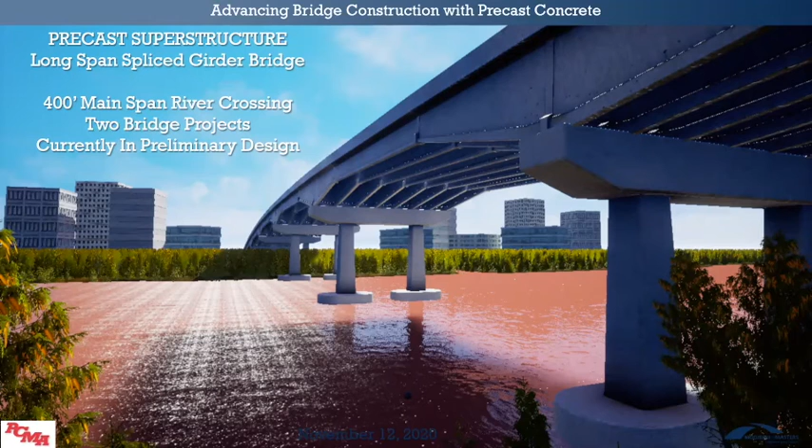Another exciting project we're currently working on involves two different river crossings with 400-foot spans that use precast splice construction. You might ask, how do you get a 400-foot span bridge built, shipped to a precast facility, and shipped to the site remotely? The way we do this, as this movie will illustrate, is we split the pier pieces in half and splice them over the pier - breaking it into smaller and smaller pieces to accommodate that.

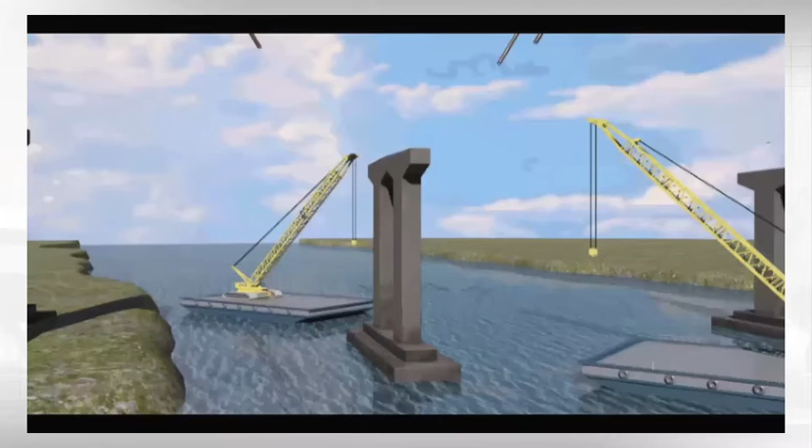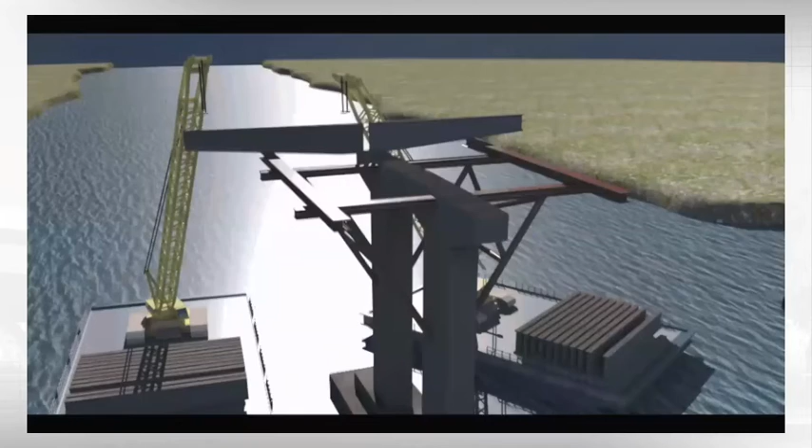As you saw on Sergeant Beach, we did the drop-in by field splicing two pieces. But you ship as big as you can. Here we have the half pier piece set up on what I call gigantic overhang brackets, just to keep it stable and supported until we can splice it together and connect it to the piers. So you bring in each half, set them all out, cast connecting splices, post-tension them together, then set the end spans, and then you're ready to set the drop-ins on the 400-foot span in the middle of the channel with barge-based construction.

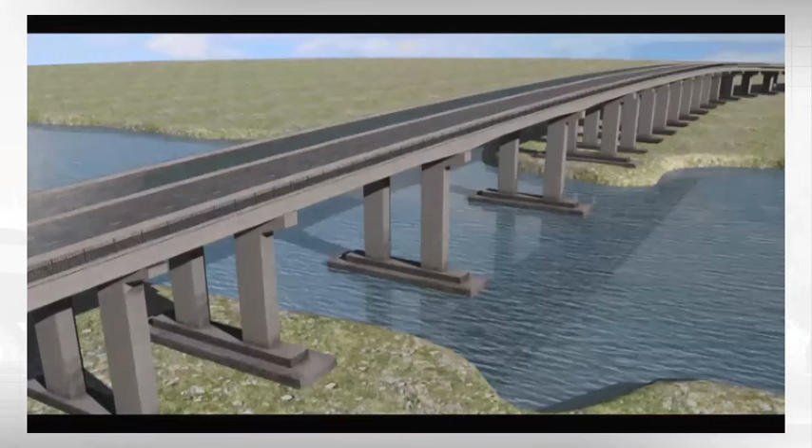The pier girders here are about 15 to 16 feet deep, with a constant depth of about 9 feet. So as we get longer spans, we get deeper, heavier girders. But by breaking them in half, we're able to get something that you can actually ship to the site. We don't want to see that one again.

So in wrapping this up, again, my passion in all of this is constructability-based designs. I get a lot of feedback from contractors on how to do things, what they like, what they don't like. After 30 plus years of working with contractors, we try to focus on how you're going to build it before we do anything else, before we run any numbers. It's got to be able to go together. It has to make sense in how you build it. The way you do that is use simple, repetitive details as much as you can, and give people greater tolerance at all the connections so you don't end up with field problems. This tends to make things go smoother, which makes it go faster, reduces labor costs, less hair pulling and issues and rework, and a better finish on the product that you ship to the site.

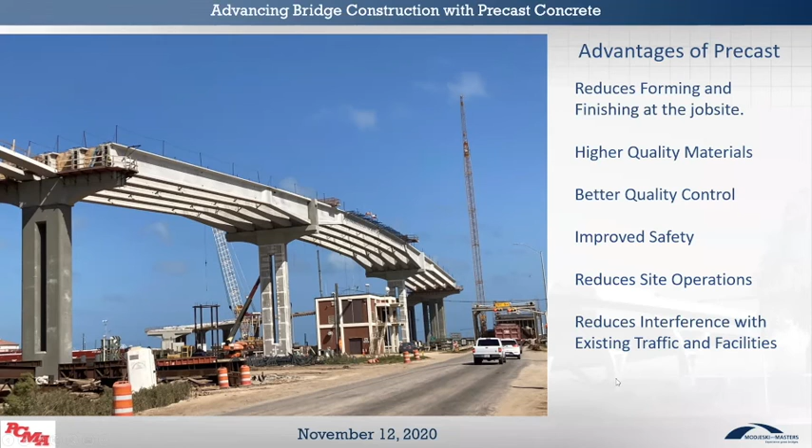And also it can be done in a very efficient manner as well. So restating a lot of the advantages we have here: we've got reduced forming, higher quality material, higher strength concretes, better quality control on the ground in the yard with established practices, improved safety by removing a lot of intrusion on the job site.

This is safety for the workers, safety for the motoring public, because you're reducing interference with traffic and reducing site operations. So with that, I'm going to wrap up. I'm bullish on precast concrete - it's what I do, it's my specialty. We've come a long way with precast concrete, and as you can see, we've still got a long way to go. But we've got a really high quality product that can greatly enhance the facility, the economy, and the scheduling of these construction sites and improve safety as well. So with that, I thank you for your time, and I'll entertain any questions you may have.